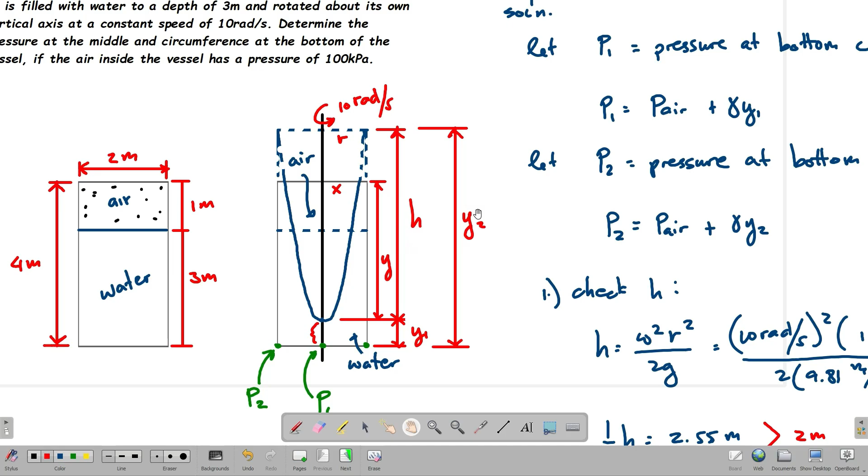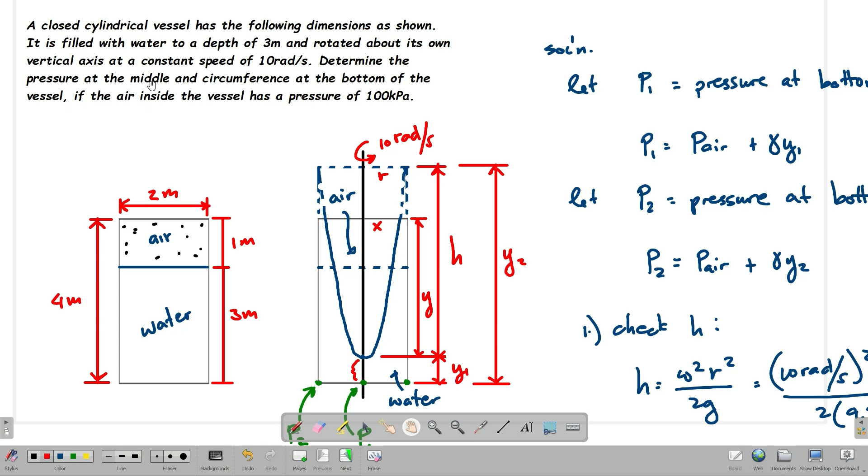Our solution: let P1 equal the pressure at bottom center, and let P2 equal the pressure at bottom circumference. There are two things being asked—the pressure at the middle and the pressure at the circumference or edge of our cylindrical vessel. Here, these are the green points.

We have pressure 2, which is the same on both edges since our vessel is a cylinder—that's the circumference. And we have P1 at the middle, the middle bottom or center of the bottom of our cylindrical vessel.

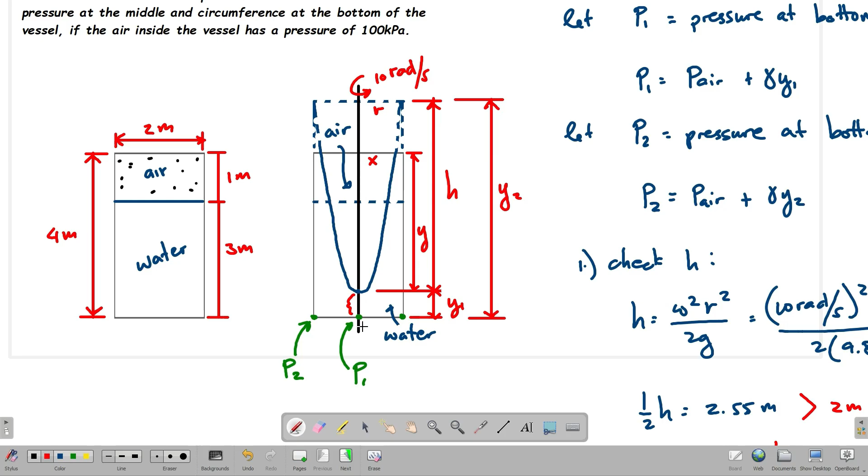These are the equations to get pressure 1 and pressure 2. Pressure 1, of course, is at this point at the middle of the bottom. What we'll do is add the pressure of the air in this space plus the pressure of the liquid column here, which is just unit weight times height. So we have pressure of air plus unit weight times height, where the height is equivalent to Y1. This is our equation: P air plus unit weight times Y1.

Again, our pressure here is just an application of the hydrostatic pressure equation from our previous topics. The pressure at the circumference is equivalent to the pressure of the liquid column, projected from that line down to the very bottom. Again, we add the pressure of the air, since it's not open to the atmosphere—there's always the presence of air pressure inside the cylindrical vessel, adding pressure due to the air exerted on the walls of the vessel. So P2 equals P air plus unit weight times Y2, where Y2 is the projected height of the paraboloid down to the very bottom.

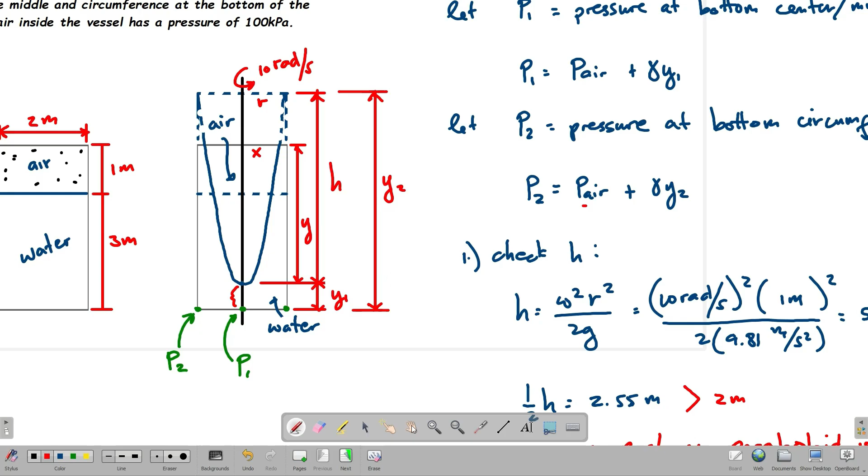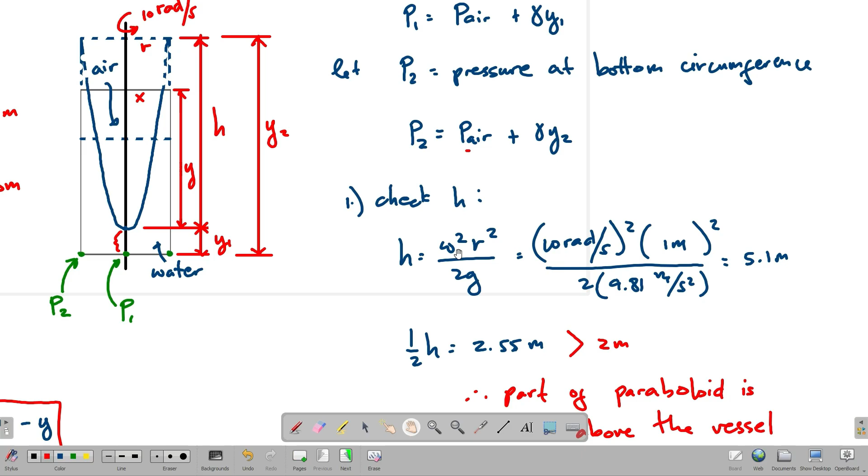So first, we check or get the value of H, which we can get from this equation—the same equation we use for open cylindrical vessels, rotating open cylindrical vessels. We have W squared R squared over 2G. W is the angular speed, the constant angular speed, that's 10 radians per second as given. Our radius is 1 meter since the diameter is 2 meters. And then we have the acceleration due to gravity, that's 9.81. So let's confirm our answer here.

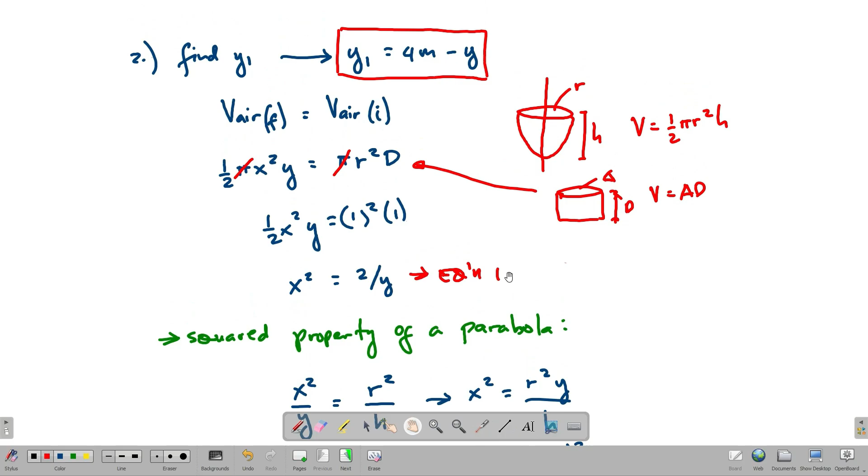So we have x squared over y equals r squared over h. Parang similar triangles lang yan, pero parabola ngayon yung ginagamit natin. Bali itong partner na to, si x siya kasi y, tapos x squared lang kasi open yung parabola natin along the vertical axis. Bali sa parabola natin, dalawang values ng x for a single value ng y.

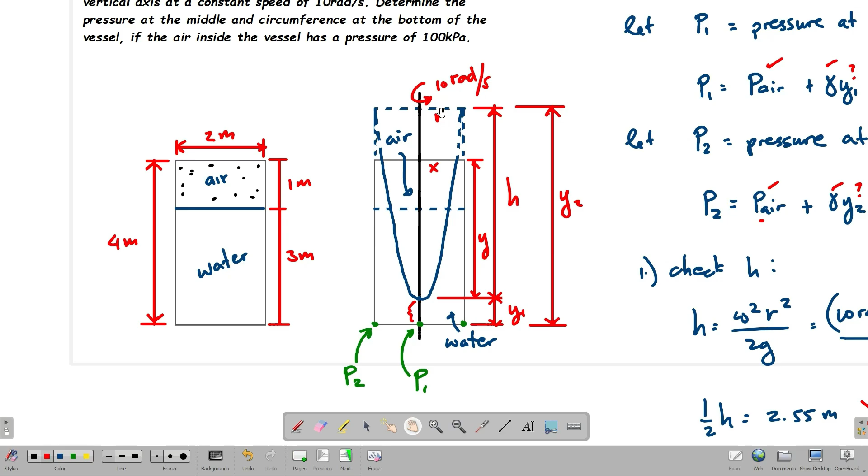So we have x squared over y is just equivalent dito sa r squared over h na mas mahabang vertical dimension. So ganun na lang, no? X squared over y equals r squared over h. Review nyo lang yung mga property natin ng parabola kasi lagi natin magagamit yan dito sa rotating vessels, okay?

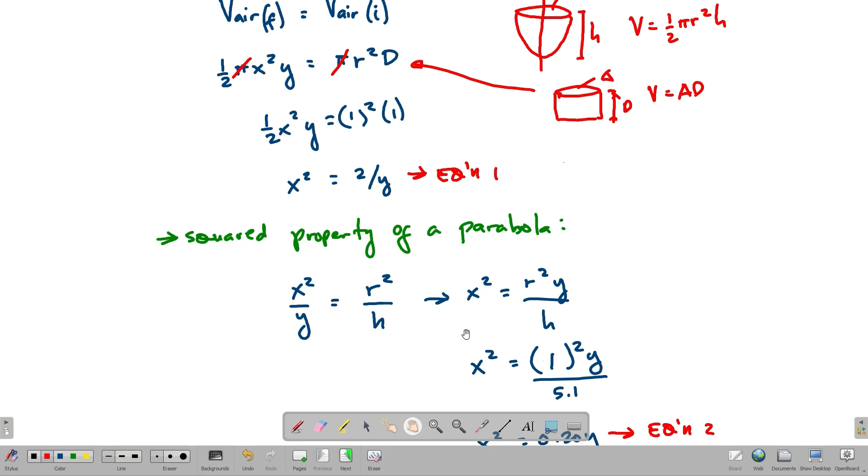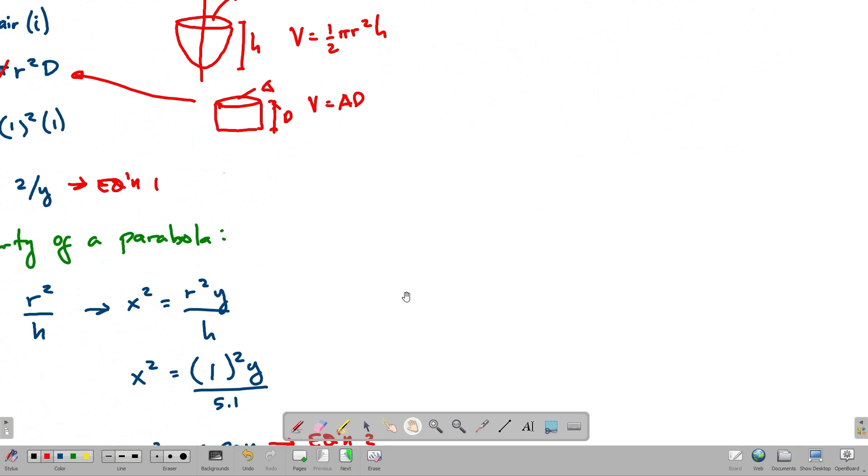I-simplify lang natin para makuha natin yung equation din for x squared para pwede natin i-substitute mamaya dito sa equation 1. So x squared equals r squared y over h kasi ililipat lang natin dito yung y, tapos yun na, no? And then substitute natin yung radius na 1 meter, tapos yung h na nakuha natin kanina, which is 5.1 meters. And then, i-solve natin yung 1 square divided by 5.1 para ma-confirm lang. So that's 1 divided by 5.1, 0.196 or that's round off natin, 0.2.

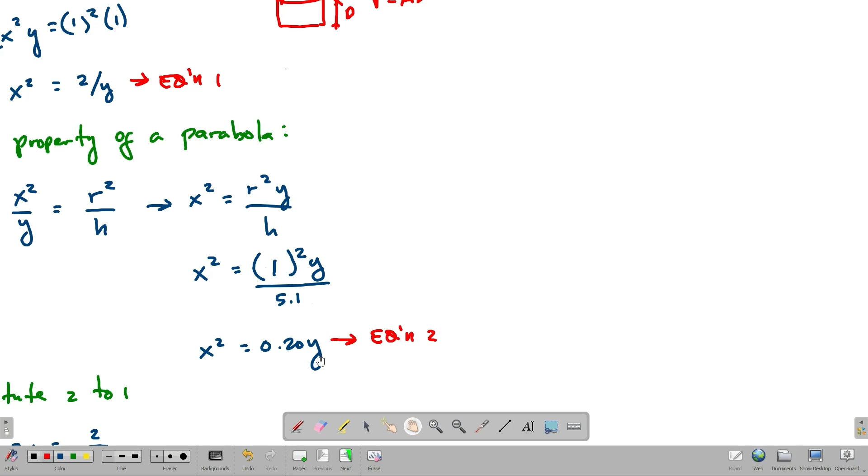So yun yung equation 2 natin. Substitute natin yung equation 2 to equation 1. So we have 0.2y equals 2 over y. Tapos lipat natin yung y dito, no? Y squared equals 2 divided by 0.2, makukuha natin si y as 3.16.

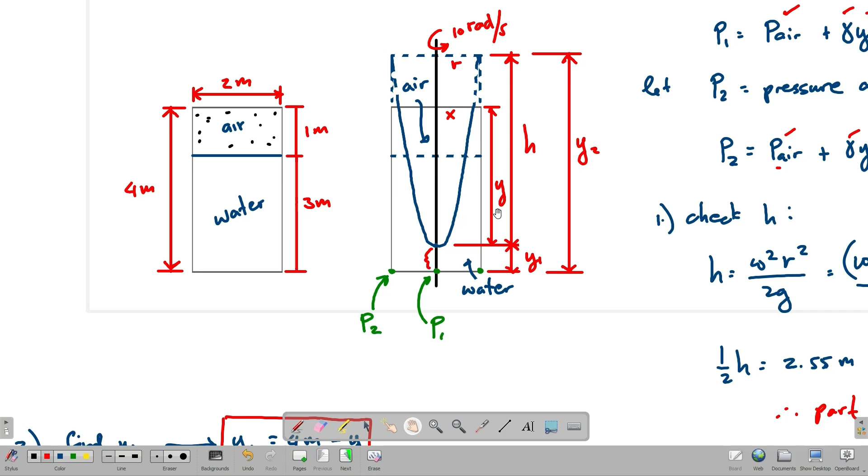Confirm lang natin. So that's square root of 2 divided by 0.2, that's 3.16. Okay? So mas na-confirm natin talaga na hindi siya aabot dun sa bottom ng vessel natin kasi less than yung y, which is 3.16 meters, dun sa 4 meters. So ito yung y, which is 3.16 lang, hindi siya abot dito hanggang sa 4 meters, which is the total height ng vessel natin. Okay?

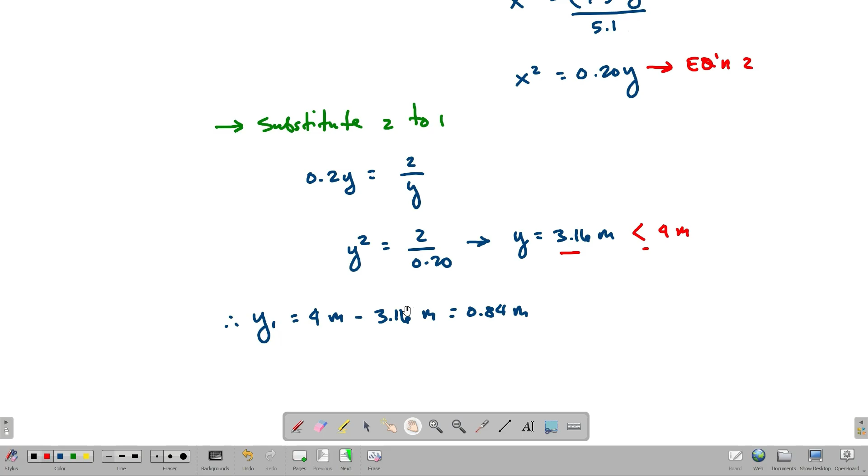So therefore yung y1 natin is just equivalent to 4 minus 3.16 based sa figure natin, no. So i-confirm lang natin yung value, 4 minus 3.16, that's 0.84. And then, meron na tayong y1, no?

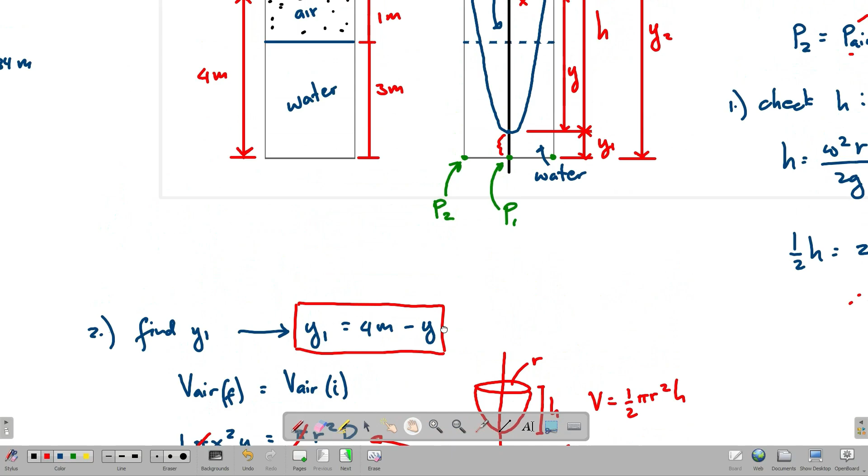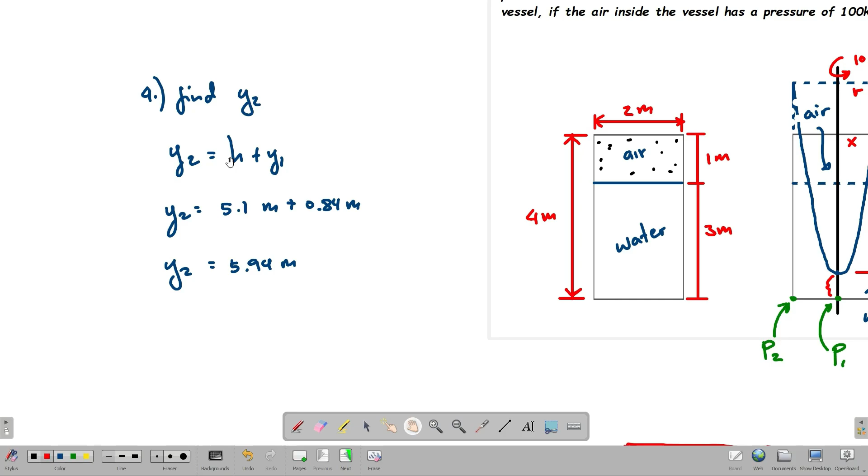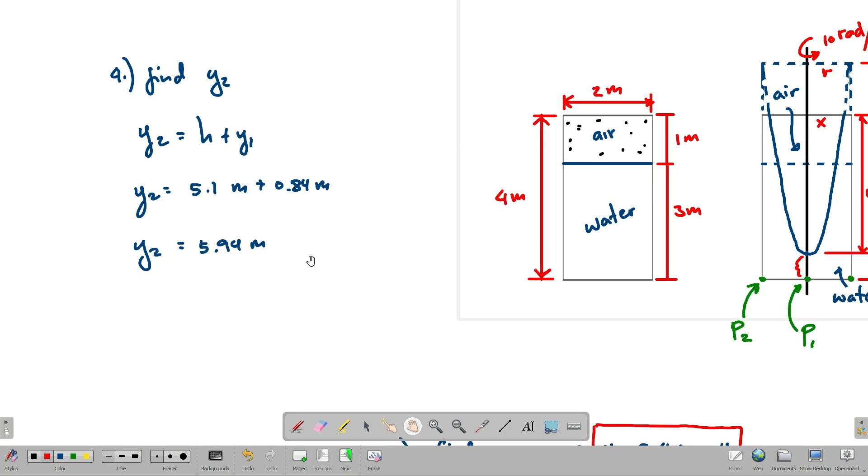Tapos si y2 naman, madali lang, no? Para makuha natin si y2, i-add lang natin si h saka si y1. So this is equation for y2: h plus y1. Based lang dito sa figure natin, y1 plus h or h plus y1. Tapos substitute lang natin, no? Si h is 5.1 meters, tapos si y1 yung nakuha natin kanina is 0.84. So i-add lang natin: 0.84 plus 5.1, that's 5.94. So meron na tayong y1 and y2.

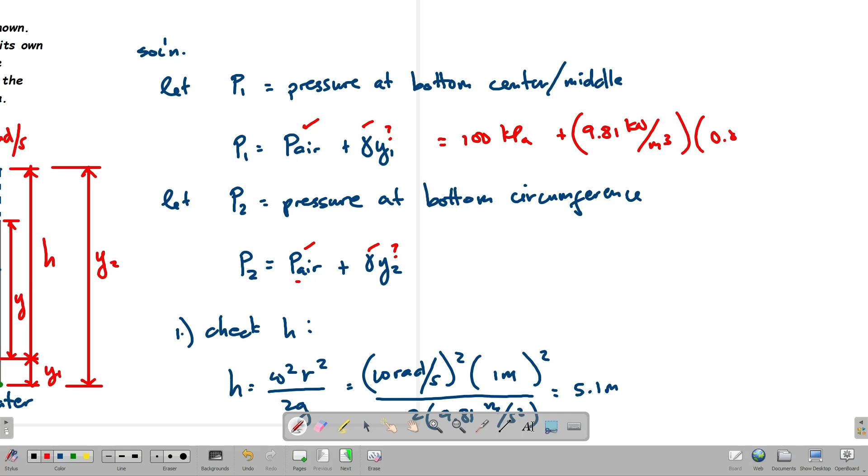So pwede natin isolve yung pressure 1 and pressure 2. So therefore dito we have is equivalent to 100 kilopascals plus unit weight, gamitin natin is 9.81 para kilonewton na siya, kilopascals na din yung lalabas, no? And then we have y1 is equivalent to 0.84 meters. That's equivalent to, sa calculator natin, 9.81 times 0.84 plus 100. That's 108.24.

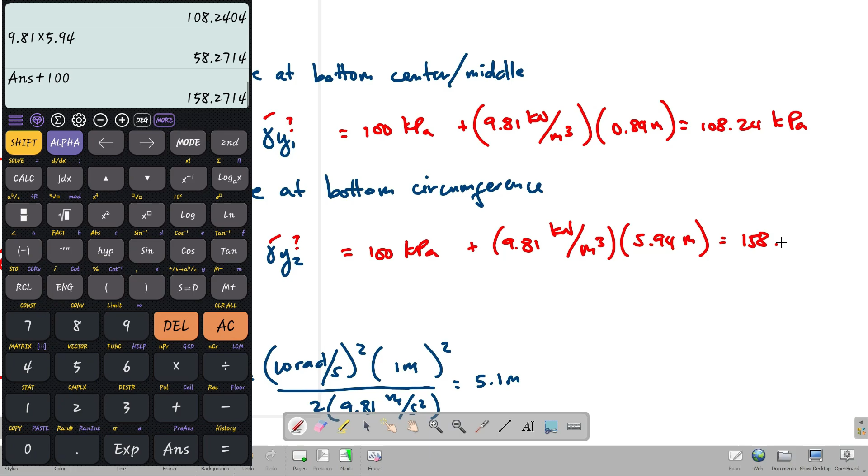108.24 kilopascals. Tapos dito naman sa baba, we have 100 kilopascals plus, same pa rin na unit weight, no? 9.81 kilonewton per cubic meter times yung y2 natin na 5.94 meters. That's equivalent to 9.81 times 5.94 plus 100. That's 158.27 kilopascals. Okay? So check lang natin yung units natin na magkakancel to. Tapos ito, dalawa na lang matira, no? M squared na lang, so that's kilonewton per square meter, that's kilopascals, no? Same pa rin dito sa kabila, no?

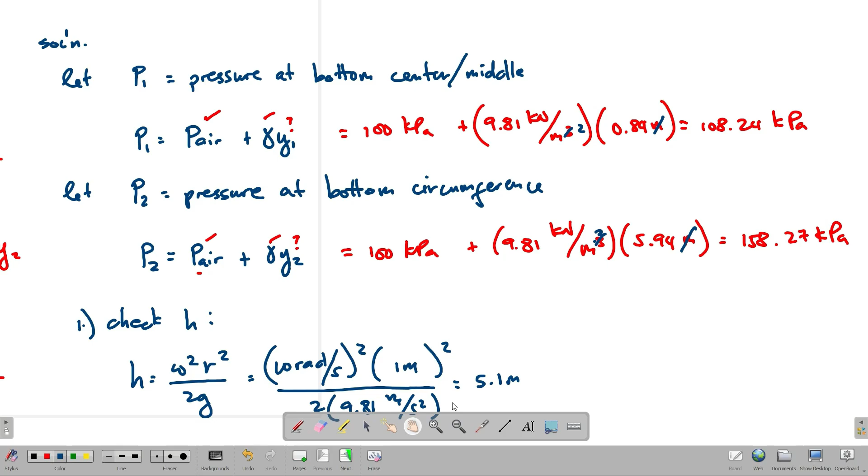Okay, so I think ganito lang, no? Ganito lang yung pag-solve natin for closed cylindrical vessel. So may mga cases din na, no? Yung na-mention natin kanina, na pwedeng lumagpas dito yung paraboloid sa baba, or pwede rin na ganito lang, no? Or pwede rin dito sa taas, no?

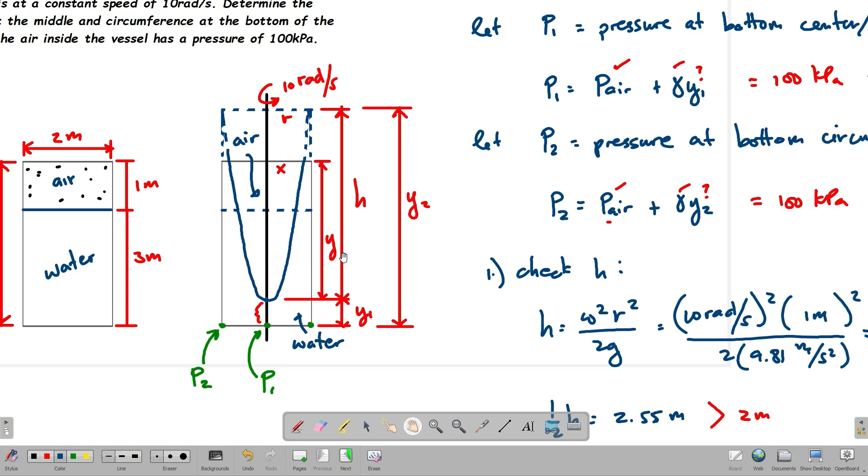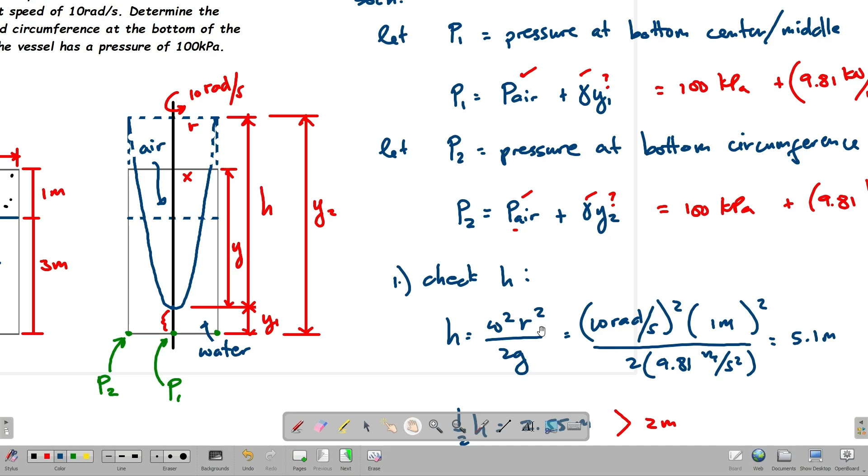Depende lang dun sa depth ng liquid and depende dun sa revolution din, no? Kung mas mabilis, syempre yung revolutions per minute or radians per second, syempre mas tataas yung h kasi yung h is a function of the angular speed. So mas malaki yung ω, mas malaki din yung h. At saka, of course, yung radius din. Pag mas malaki yung radius, mas malaki din yung value ng h. Okay? So I think yun na yun, no?